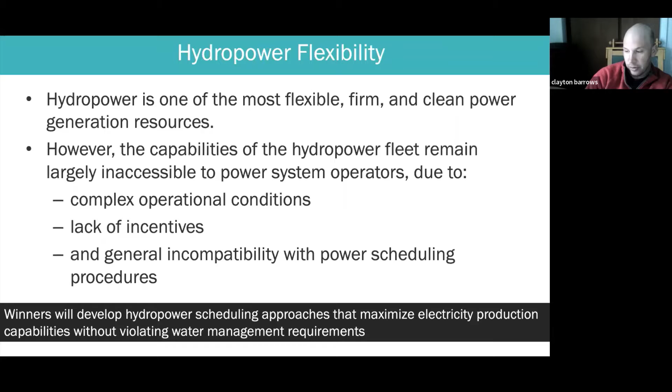So the mission statement really here is that winners will develop hydropower scheduling approaches that maximize electricity production capabilities while considering and without violating water management requirements. So we're really trying to incentivize competitors to develop those particular solutions. So in particular, we've thought about this in 3 ways.

So first of all, we're trying to incentivize hydropower management performance, and that's kind of trying to make sure that the hydropower scheduling solutions that competitors identify respect the water system's physical and operational constraints. So the goal here is make sure that you are respecting and representing the river basin management and doing a good job of meeting the physical constraints while trying to meet the management constraints to the best extent possible.

And doing that while also providing the greatest benefit to the power system according to the incentives that have been identified, both economic and environmental. And we'll lay out what those are exactly in a few minutes.

And finally, we're really hoping that any solutions are novel and scalable and broadly applicable. So really, we're looking for solutions that are not just finely tuned to the problems that we set up for the competition, but also could be applied to larger scale systems and more realistic systems and different conditions. So we really are looking for novel and really flexible techniques.

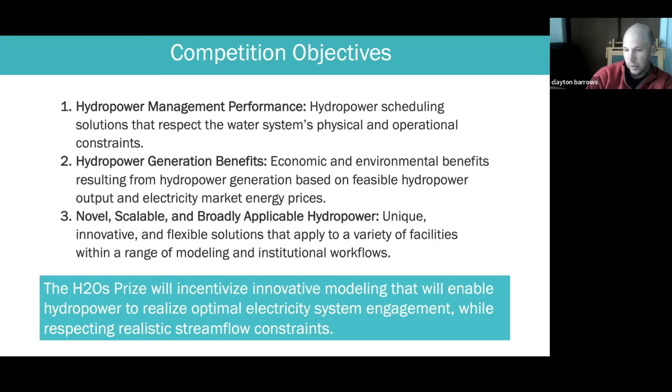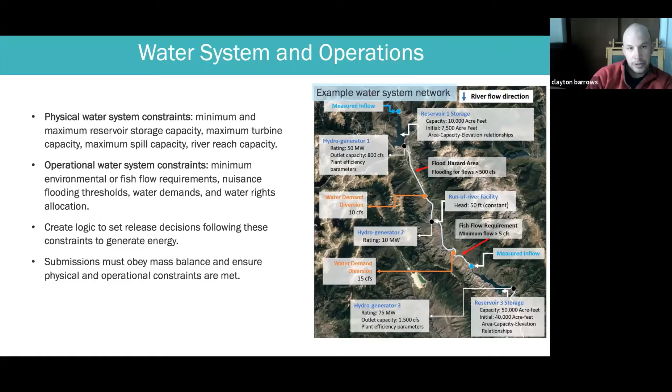And so we are hoping to incentivize innovative modeling that will enable hydropower to realize the potential in making sure that we evolve towards more sustainable energy systems. And with that, I'll let Abby talk about some of the water system operational representations in the competition problems.

Great, thanks, Clayton. Hi, I'm Abby Watson. I am with RTI International, and I'm a water resources engineer. And so we've worked with Clayton and his team to help develop out the competition.

So just to piggyback on what Clayton just talked through, as part of this competition, we're seeking solutions that adequately represent the water system. We want to make sure any hydropower production scheduling solutions are providing feasible hydropower production, so we're not overestimating how much hydropower a given system can produce. And so in order to do that, we describe each phase water system by describing both the physical water system constraints and operational water system constraints.

So physical constraints are actual physical limitations of both the managed and natural parts of the system. So for each problem, we will describe the reservoirs and hydrogenerator capabilities, with elevation area capacity curves, plant efficiency curves, turbine capacities, outlet capacities. And then also, if applicable, we will describe the river system, if there's river reach constraints or if there's lag and attenuation in the basin, characteristics like that.

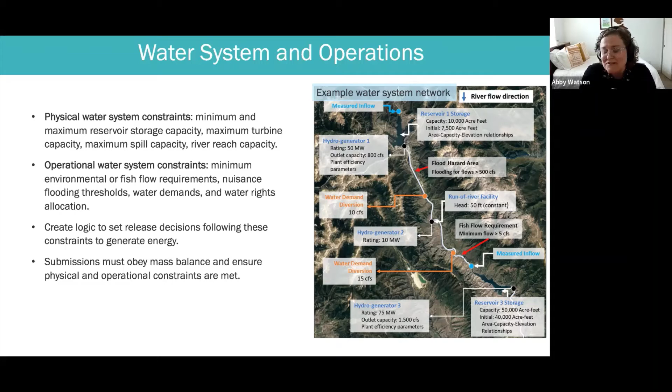And then there's a run of river facility, which means there's either no or a very small amount of storage to operate, but there's hydropower capabilities, followed by another water demand diversion, a fish flow requirement, another measured inflow, and then another reservoir. So as you can see, these systems can be highly complex, which makes this competition pretty interesting. And I'll let Clayton talk more about the power benefits.

Thanks, Abby. Yeah, so in addition to respecting all the constraints of the water management and the physics of water flow, we are asking competitors to consider the power system operations in this scheduling. So the real goal here is to coordinate with the power system and try and minimize the total system variable cost. So the idea here is to participate in something like an electricity market clearing process, and submit water system energy offers according to the water release schedule that minimize total system operational costs. And that problem considers, in addition to the operational costs, the operational constraints of each unit.

So the unit level constraints of turning on and off generating units in the system to meet system demands, and meet the system level constraints like system load balance, nodal power balance, and transmission capability constraints. And so the idea here is that your water release schedule will be converted to an energy production capability that will be offered to the electricity market that will clear to satisfy all these constraints and create a dispatch schedule for each generator in the system, including the hydropower generators.

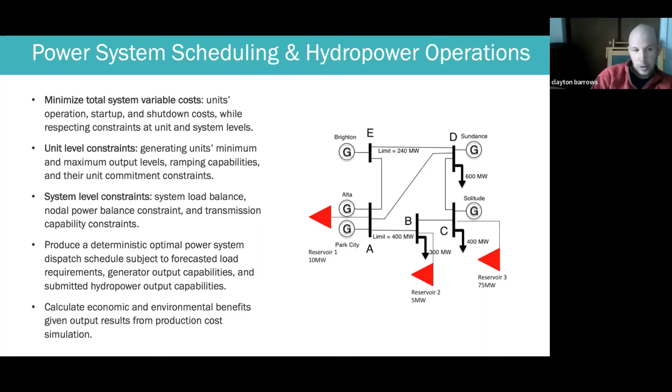And so ultimately in this competition, competitors are acting as hydropower fleet schedulers, and they are providing reservoir release schedules from each reservoir that is then calculated by our scoring platform to determine the hydropower generation capability offered to the electricity system. And then again, the platform will determine the power production that is dispatched to by every generator, and produces an economic and environmental benefit from the power system operations.

So in that, there is a requirement that water release schedules are subject to penalties for violating water system physical and operational constraints. Physical violations are very costly in that you will get a very bad score if you violate the physical constraints, and the operational constraints are less costly in that they are penalized, but not so severely. So the goal here is to not get penalized by violating physical and operational constraints in the water system, and get incentivized to produce as much economic and environmental benefit in the power system. And we'll define exactly what those are.

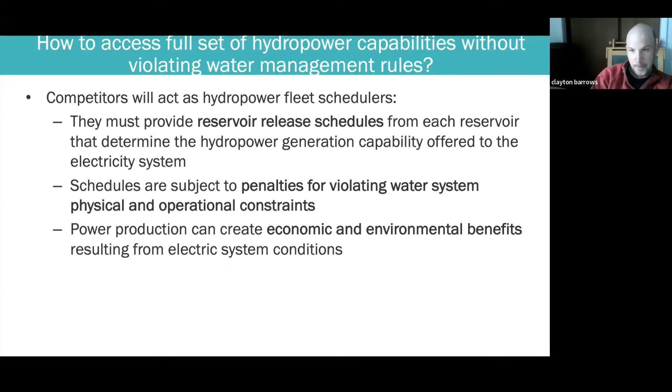Okay, so a little bit about the competition in general: the competition will provide input data to each of the phases. So the input data will describe the power system, it will describe the water system, and we'll go into some details about what the structure of that data set is in just a minute. But if you want more details, you can look at the dataset description PDF, which is included in the competitor package once you sign up on the Topcoder platform. But it also includes a power system data.json and a water system data.json, which go into details of describing the parameters of each of the generators and reservoirs and river reaches and so on and so forth.

Each phase challenge problem will be driven by system size, operational horizon, and water management rules. So we will keep the same structure through each phase, but we will vary the size of the problem. We may add generators. We may increase the number of nodes and network size. We may increase the horizon over which the competition is simulated, so a week to maybe a year or something like that. So the data should be complete in that you should have everything you need to solve the problem with the data that we provide.

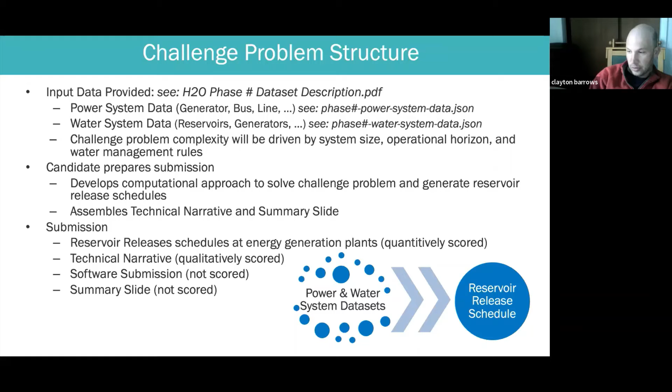So the prize is being offered in 3 phases of increasing complexity and increasing reward. So the first phase is well underway. I believe there's a little over 2 weeks left in the submission window on the Topcoder platform.

And then we will open phase 2 sometime in June, and then phase 3, the sort of grand prize phase, will be later this year. In total, the prizes add up to about $75K. And for each phase, we will keep the same data structure and general structure of the prize, but we will adjust the data sets that describe the power and the water systems in there.

And so for right now, we have somewhat simplified problems by not providing some of the data that we've described up to now in this presentation. But we may exercise that description to provide additional data on transmission line limitations, water operational constraints, things like that. So we have laid things out in the rules document and in all of this description to give freedom to create fairly complex problems. But it is worth noting that the phase 1 problems are significantly less complex and don't include all of those details.

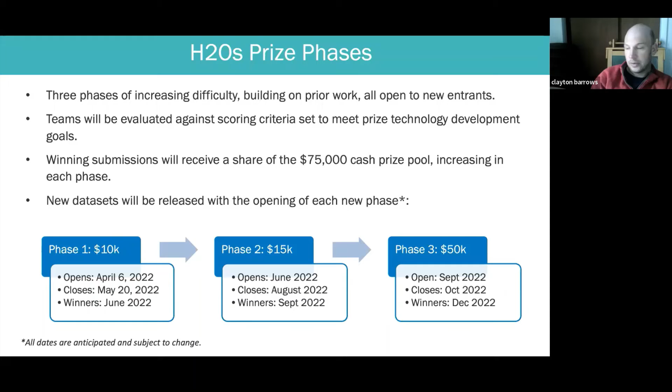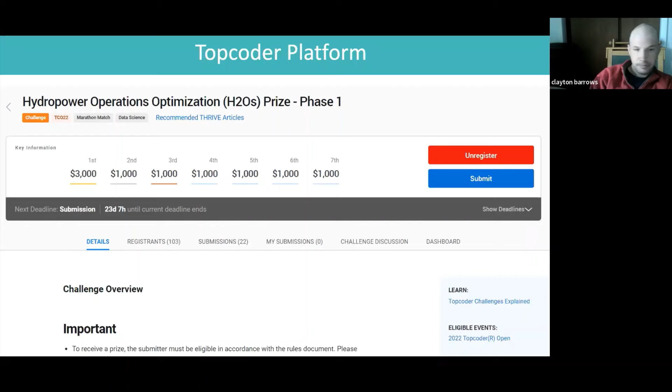Okay, so a few details about submitting and getting scored and what you can expect through that process. So another review of the submission requirements. We are asking for a submission summary slide. Really, it's like a title page. The reservoir release schedule is the principal submission. This is the main piece. This is the only piece that is being scored in the automatic scoring process on the Topcoder platform.

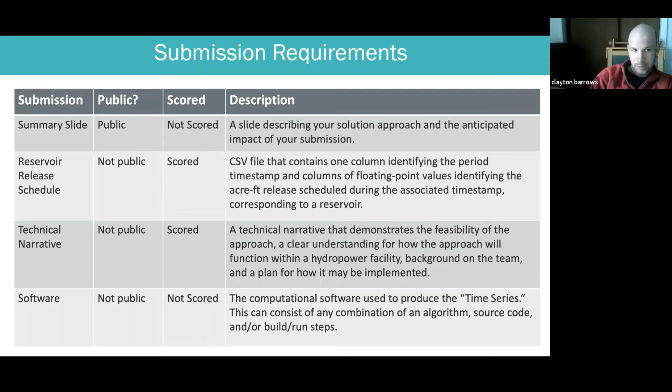Then a technical narrative is required to get a final score and does go through a qualitative scoring process that we will conduct with several expert reviewers after the close of the competition window. So for the first phase, that's in a couple of weeks. And then the final piece is the software that we are asking folks to submit, but we will not be scoring and not be making that public. The only public piece of the submission will be the summary slide.

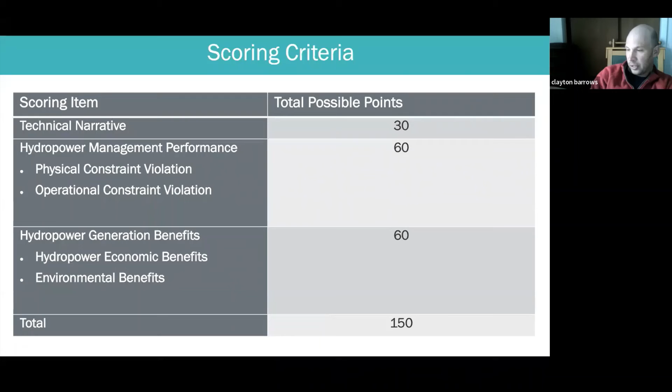Scoring of the hydropower release schedule, we have broken that down into a few categories. So, sorry, there's a qualitative scoring of the technical narrative worth 30 total possible points, and then the quantitative scoring that will be automatically evaluated on the Topcoder platform is broken into a hydropower management performance score and a hydropower generation benefits score. And so this is kind of broken across the ability to respect the constraints on the river basin management and physical representation of water flow side, and then on the ability to perform well in the power system operations side. So those are worth 60 points each. And then in combination with the qualitative technical narrative score, the total possible points is 150.

And then in addition to that, the hydropower production that is calculated from the water simulation is passed to the power system simulation as an offer into the economic dispatch problems that are being evaluated. And that power system simulation then clears the set of optimization problems to optimally schedule power system resources and generate electricity prices and electricity dispatch signals for each generator. And those are used to calculate the hydropower generation benefits. And that's both on an economic and environmental basis. And then these are combined together to create a total quantitative score.

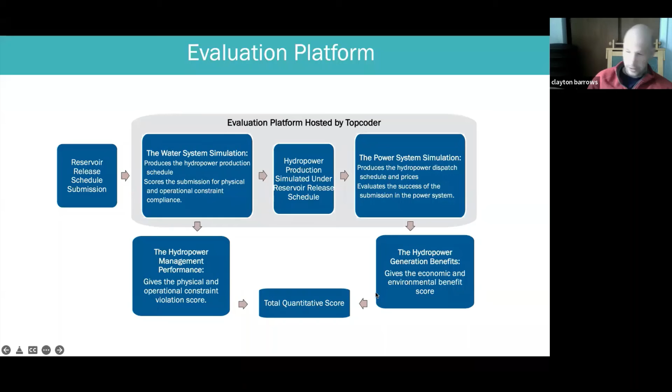So we've created a benefit factor, which is clearly spelled out in the rules document. And then we, again, take the scheduled hydropower production times the benefit, and we sum that up over each hydropower facility, and then over the time series that the schedule represents. And then we use each of those to create these benefit metrics.

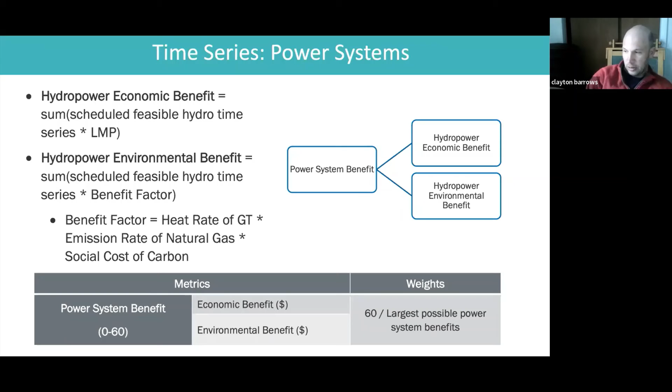And we are scaling that to have a total possible number of points of 60 points. And we normalize that by the largest power system benefit. So we take the maximum possible prices and create that as largest possible benefits. And we take a maximum possible output to create the maximum possible environmental benefit. And this, again, is spelled out in more detail in the rules document. And Abby can describe a little bit more about the water system performance score.

Sure. So kind of like going over what we've talked about in the first water system slide, there are two types of constraint violations: the physical constraint violation and the operational constraint violation. So a physical constraint violation represents a fundamental error in accounting water, either spatially in the water system or over time throughout the simulation period. And this part of the score is heavily penalized because if you violate these physical constraints, it means the reservoir release is not physically possible. And we don't want to let that happen.

And so for each reservoir in the system that you are scheduling operations for, there's an inadequate release score and an excess release score. So an inadequate release occurs if the competitor submitted release is less than the feasible release. And so this can occur if a reservoir is completely full and the competitor submitted release is too small, causing the dam to overtop. We consider that in this competition to be a physical violation of the described problem data set, and therefore penalized. On the other side, we have an excess release score.

And so that occurs if the competitor submitted release is too large or greater than the feasible release. That can occur if, for example, a reservoir is nearing empty and the competitor submitted release is too large for that reservoir volume and other upstream inflows to support. And so that will incur that type of violation. And so for every single time step, we are checking each reservoir's operations against these two ways to violate a physical constraint. And so if any given time step causes a problem, then for that entire simulation period, that inadequate release and or excess release incurs a violation of 0. So, it's highly encouraged to follow the physical constraints.

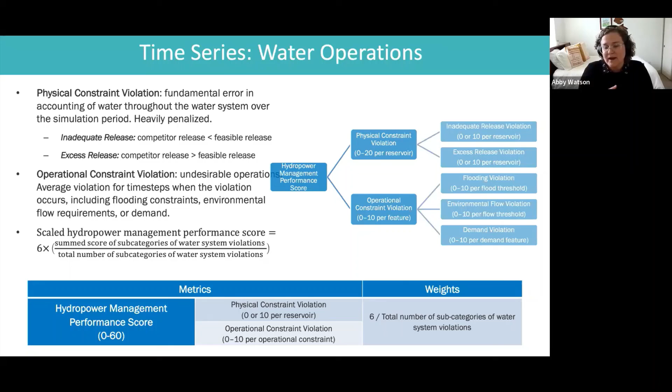And so for each operational constraint that we'll have in future phases of the competition, each operational constraint feature will be scored from 0 to 10, and that's based on the average violation score. And then for the whole hydropower management performance score, we scale it from 0 to 60. And so that will just depend on how many subcategories we have. Yep, so that's how the water system is scored.

Great, thank you, Abby. And then on the qualitative side, the technical narrative will be scored. There's a set of statements that we've asked the competitors to address in the technical narrative, and each statement will be scored on a 1 to 6 scale. We've provided a pretty comprehensive list of the type of content that should be provided. The total technical narrative shouldn't exceed 2,500 words and a few supporting figures. So not too enormous of a lift, but we will use this to help ourselves understand how each competitor came to the solutions that they've submitted.